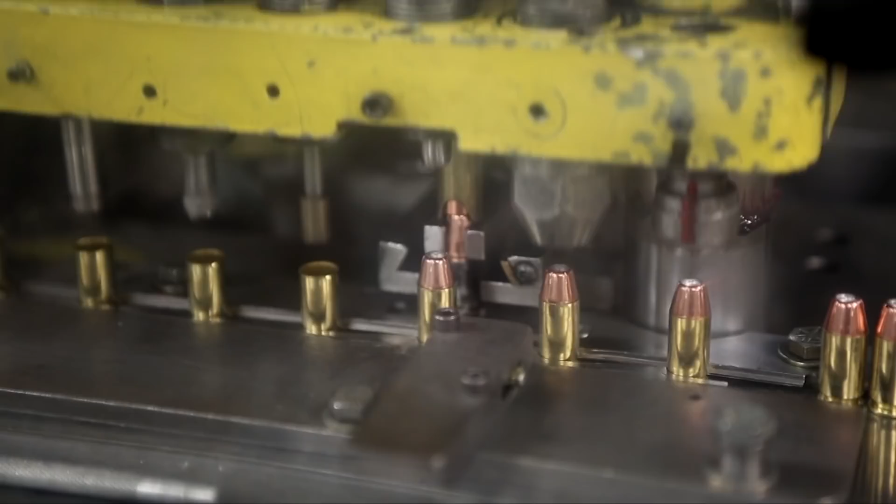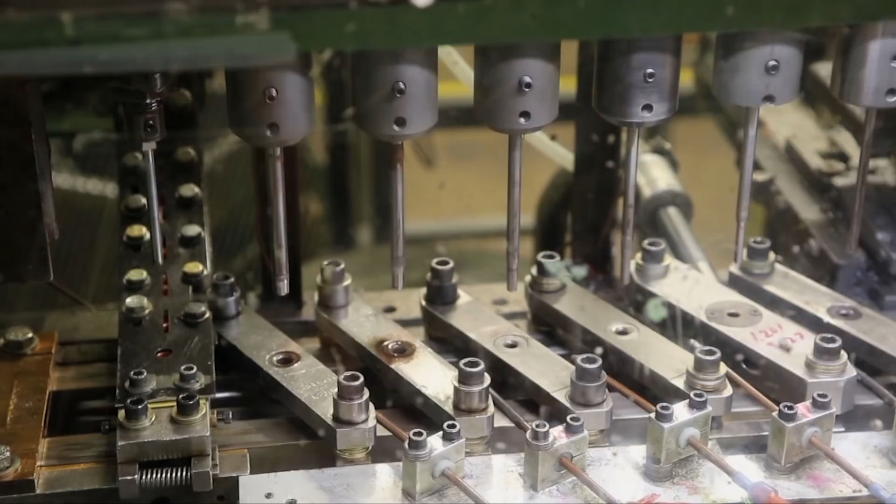Over the years at Hornady, we pride ourselves on quality, and it begins right from the design phase. In our 2D and 3D CAD models, we'll design our tooling and dies and punches, which machine we're going to run a certain product on, to try to tailor the whole design and manufacturing process and gear it towards quality, with quality in mind.

The majority of us here at Hornady are hunters, we're competitive shooters. We take our self-protection very seriously, and we really want to make the best products out there. Sometimes we'll simply see a void somewhere. There's a product that could work better in this environment. But sometimes it's through use. I'm out shooting a match, or I'm out hunting or something, and an idea will come up that says, hey, we could make this better, or we could do this that would be better.

We started back in 2012 with a goal that wound up turning into what's the ELD-X bullet, extremely low drag expanding. It's one thing to take one segment of, say, a velocity regime that goes from 3,000 down to maybe 1,600 feet per second. That's a really wide range, and you can kind of hit one half or the other of that pretty easily. But to get something that performs over that entire extreme is a really tall order.

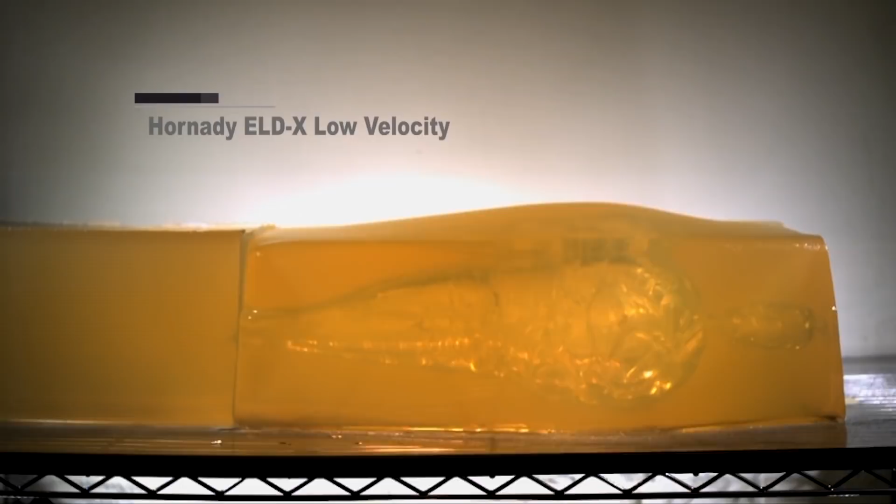This week we're in Grand Island, Nebraska, getting our hands on Hornady's new ELD-X, Extreme Low Drag Expanding bullet. Now this is a bullet designed specifically to be a good hunting bullet at close ranges, at high velocities, but also to have great terminal effects further down range when the bullet starts to slow down. It's really an impressive design, but maybe more impressive is the fact that it's also match accurate, even beyond 1,000 yards.

In working on this project, we thought we had it. Our terminal performance was great. We had a very good design from an aerodynamic standpoint for your BCs and stuff, and we were ready to go. We were ready to launch this thing, and we went out to do some final testing with it to get the actual ballistic coefficient numbers and stuff like that. And that's when we discovered the problem of the aerodynamic heating.

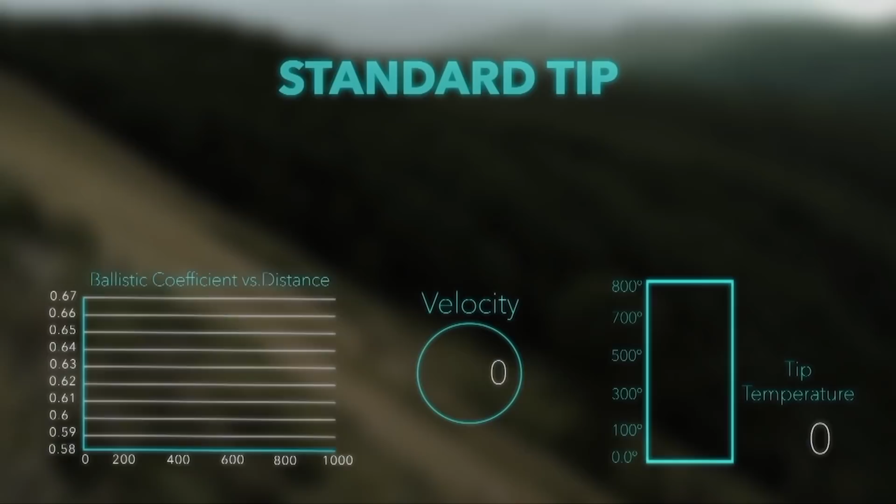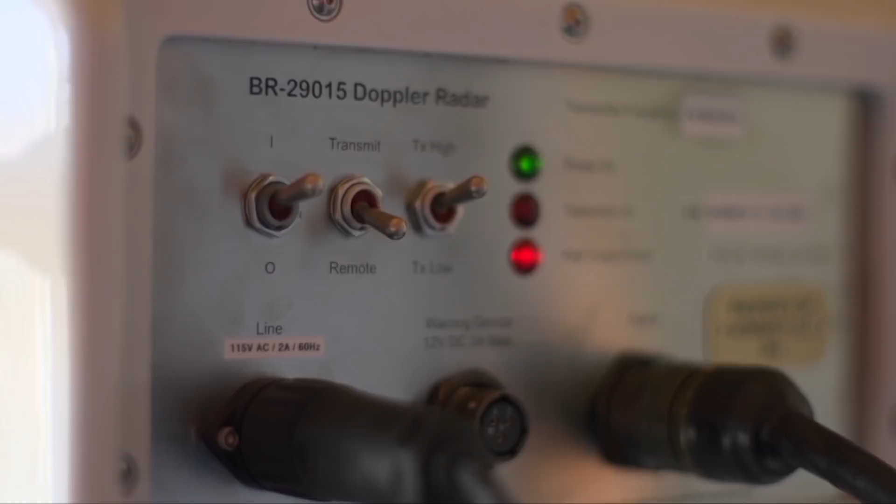What we were able to determine was, with these heavy, very high BC low drag projectiles, from about 200 to 600 yards, the drag was dramatically increasing on these projectiles because the tip was getting bigger because of aerodynamic heating. We were testing on Doppler radar, and you can't lie with Doppler. It's pure numbers. And what we saw there showed that the BC was degrading, and so we had to stop. We said, hey guys, we can't release this. There's something going on here.

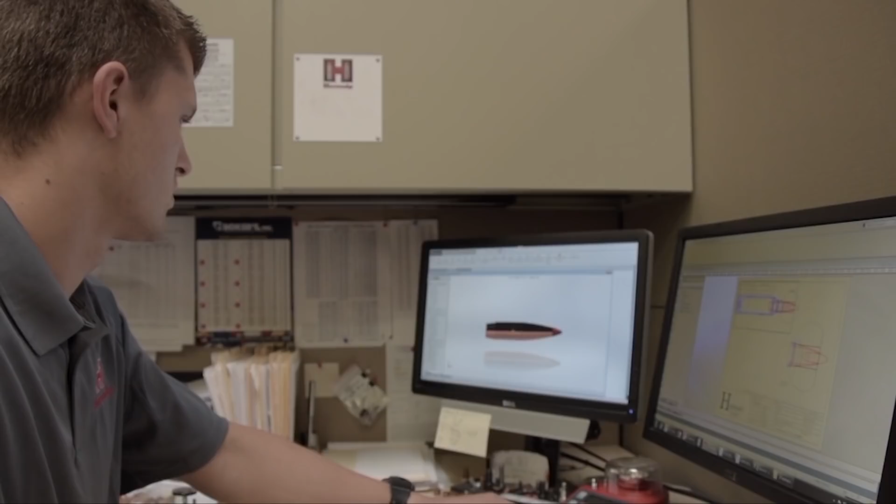It wasn't just us. We tested everybody's polymer tip bullets out there, and they all do it. It's just none of us ever knew because we didn't have the instrumentation capability to figure that out. So what we had to do was find a material that could stand up to that heat and hold its shape and not deform. We tested composite materials with metals injected into plastics. We tried many different plastics, and what we came up with, the Heat Shield tip, is basically twice the heat capacity of what we had before, and it can hold up to the heat and not deform. That's why it has consistent BCs.

This bullet is a little bit unconventional. It's designed to what we call continuously expand. Because of the tip design and the tapered jacket design, it is meant to continuously mushroom, shed a little bit of material, mushroom again, shed a little bit more material. So even at very high impact velocities at short ranges, you wind up with 50 to 60% retained weight and a very large wound cavity that goes very deep in the animal. It's very, very effective.

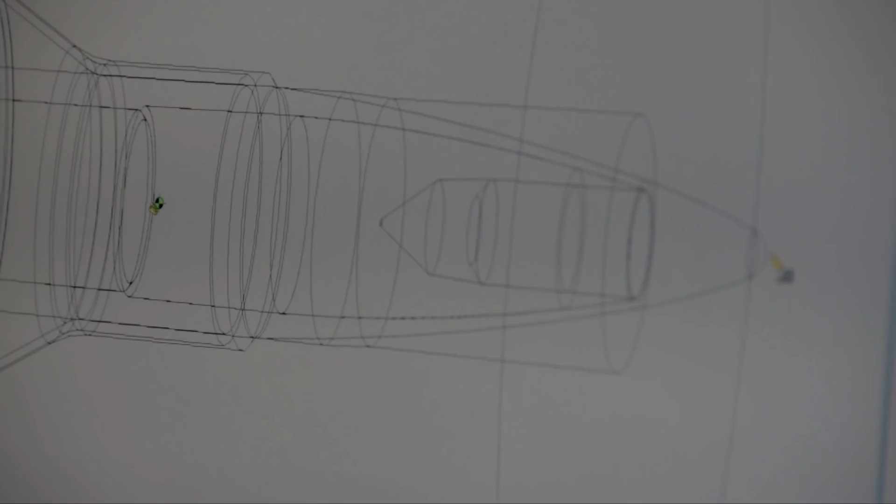At long range, we discovered a lot of things along with the Heat Shield tip in terms of very, very tight tolerances that have to be held in the tip cavity design in the lead, the design and the shape and the finish of the mouth of the jacket, and a number of things that go into ensuring that that tip at low velocity will actually set back into the bullet and initiate that expansion even down to a velocity of about 1,600 feet per second.

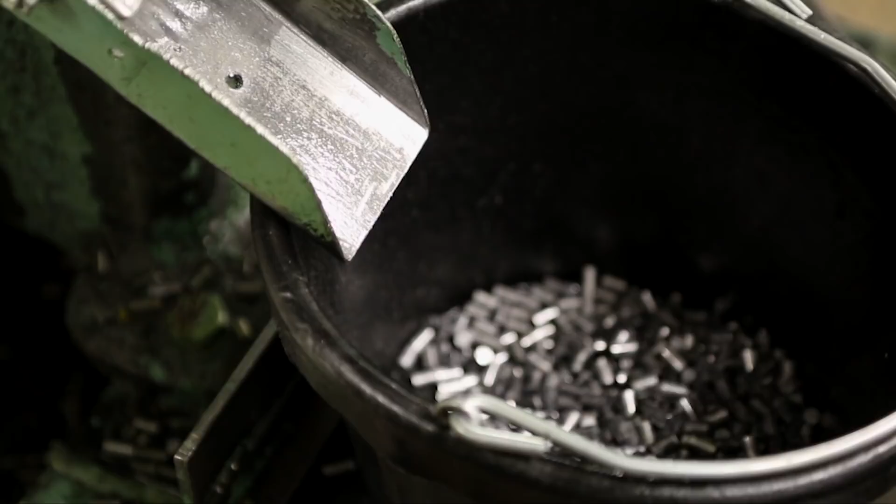And we didn't really have a product that was designed to meet their needs past those conventional ranges. And there was product out there already within the industry that we didn't feel fit the bill that was needed for those guys. And so we set out to design something that would fulfill their requirements for any range they might encounter within their skill level.

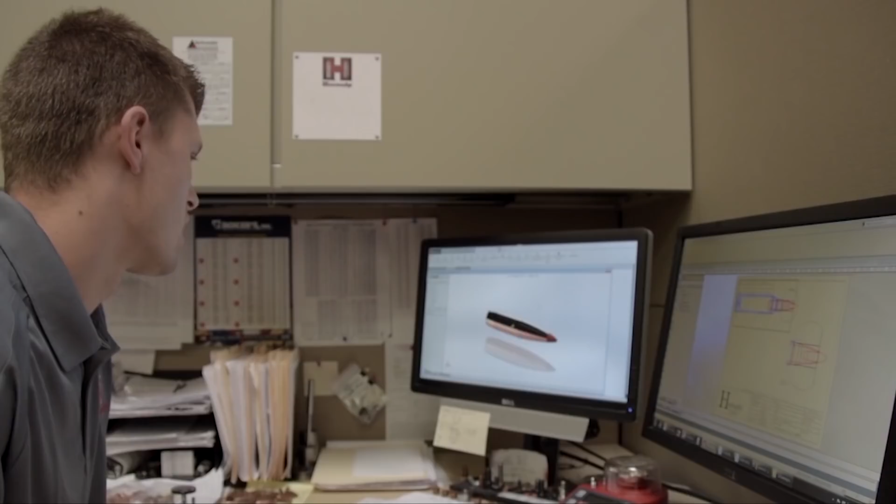Not only do we take the bullets after they're designed and test them for accuracy and precision and all those things, on the hunting side, we're known for accurate, deadly, and dependable. And the dependable part of that is those bullets have to perform terminally the same every single time through a broad range of requirements, whether it be different velocity levels, ranges, or media that the projectile may encounter. So rest assured that we are doing all of that testing up front and subsequent testing during the manufacturing process to make darn sure that those bullets meet the expectations of our customers all over the world.

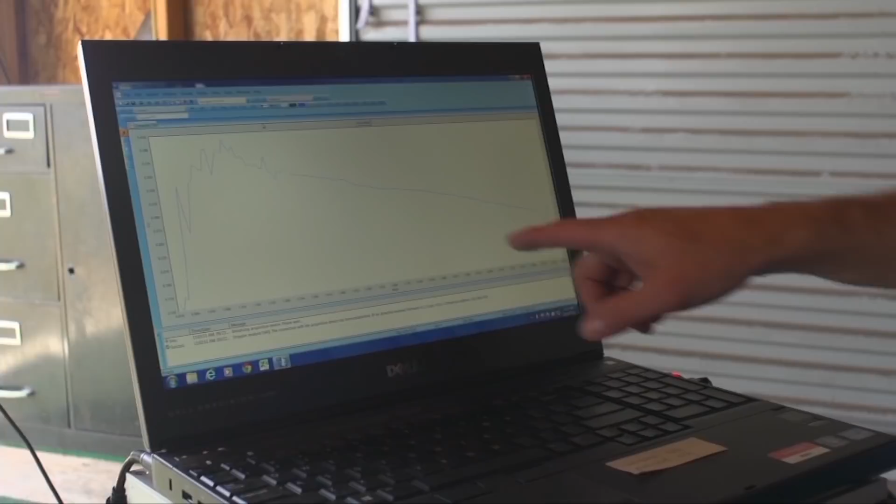It's easy to build a bullet that'll work close up or a bullet that'll work downrange, but it's hard to do both. So that was criteria number one: this thing had to perform terminally. Criteria number two would be accuracy. This thing has to be match accurate, because as you start extending that range farther and farther, it becomes more difficult to put that bullet in the exact place it needs to go. So if you have a match accurate bullet, that's what's critical to make that shot happen.

And then the third was the aerodynamics of it. The ballistic coefficient needs to be high to be able to have a flatter trajectory, to be able to resist wind deflection. Stuff like that is all going to contribute to being able to make that shot past conventional ranges.

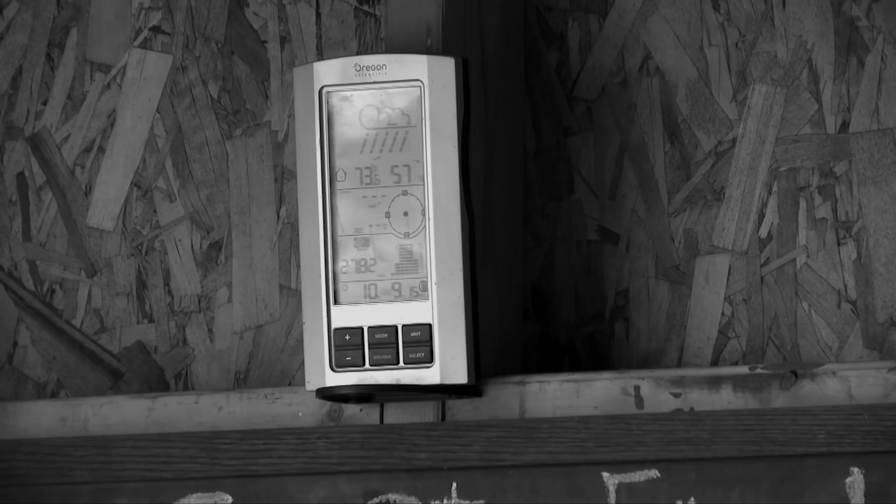What the consumer needs to know is that ballistic coefficients can definitely be misused as a marketing tool for a company. And there are ways that they can manipulate this number to come up with very artificial looking numbers. And it really is a disservice to the industry and especially to their customers, because when they go to use these numbers, if they haven't been corrected back to a standard or shot in a standard way, they're going to get completely erroneous results for their trajectories.

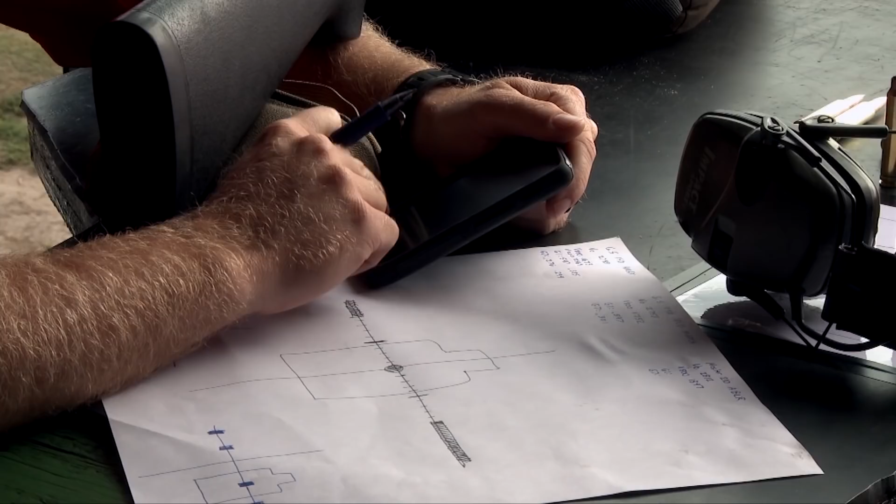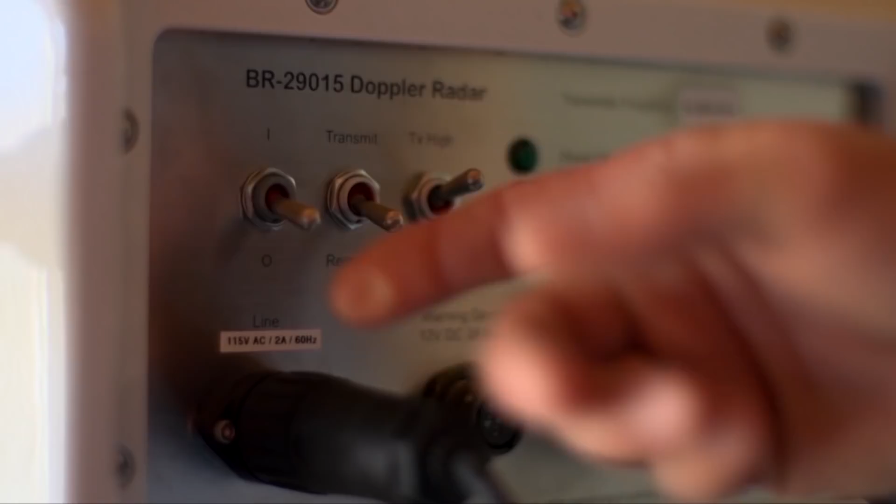They're not going to impact where they think they're going to impact, particularly at longer ranges. And I think in the future, people are going to start looking for: how has your ballistic coefficient been determined? How was it calculated? Is it corrected back to a standard? How many points over what distances did you measure your ballistic coefficient? I think the trend right now with more sophisticated measurement techniques for aerodynamic performance is going to reinvent how this is done in the industry, giving the consumer much more accurate information to get better results when they go out and shoot.

Developing an all-range hunting bullet, one that will expand in virtually any condition, that's a tough nut to crack. Jaden, what all is going on in this bullet that allows it to perform so well in those conditions?

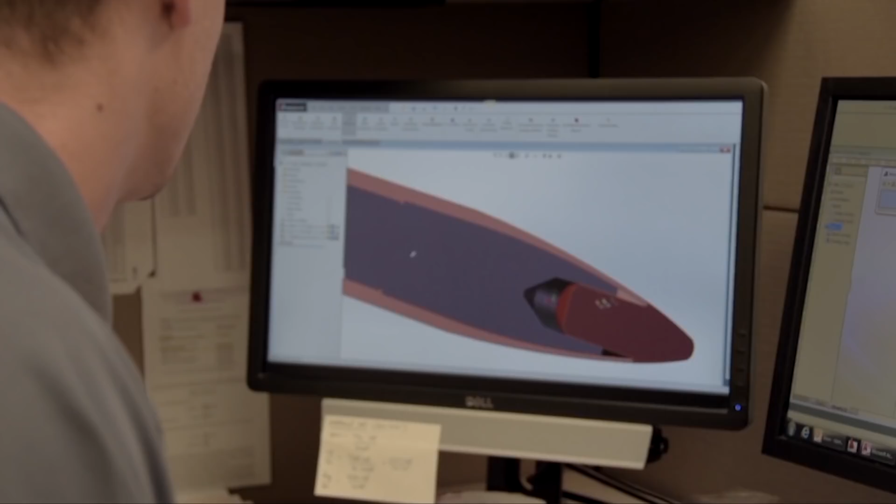A lot. We asked a lot of this bullet to be able to work at close range and equally as well at farther distances. The heat shield tip is the first part of it. That helps us not only aerodynamically, having high ballistic coefficients and good accuracy to get the bullet on target, but it also initiates expansion. It's a mechanism to initiate the expansion. And on a hunting bullet, you really want that. You don't want the target to control what your bullet will do. You want your bullet to control what the bullet will do.

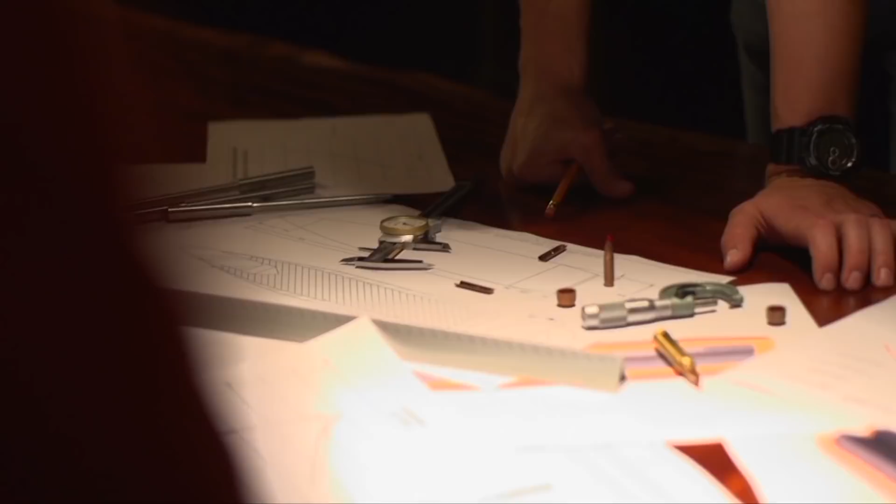The tip initiates the expansion, it starts it. Once expansion has started, we have a very critical specification on how this jacket is designed and how the tip interacts with the internals of the bullet. The jacket helps control how that bullet opens, which we're asking it to do a lot. At a closer range shot, you have a lot of velocity, a lot of energy, so it's pretty easy to get a bullet to open. But at farther ranges, you've lost a lot of that velocity, and it's harder to get the bullet to open. So it was really critical, kind of blending the heat shield tip, the jacket, the core, and the relationship they all play in getting the bullet to work at both close and far range.

And I can speak from experience that I've seen this bullet take game at different ranges in different conditions. The terminal performance was excellent, and now out here we got a really good chance to demonstrate it's also match accurate. It is. You shoot this for a little while and you start to forget that you're shooting a hunting bullet. You start thinking, man, I'm shooting a match bullet, and you're not. This is a hunting bullet that is match accurate.